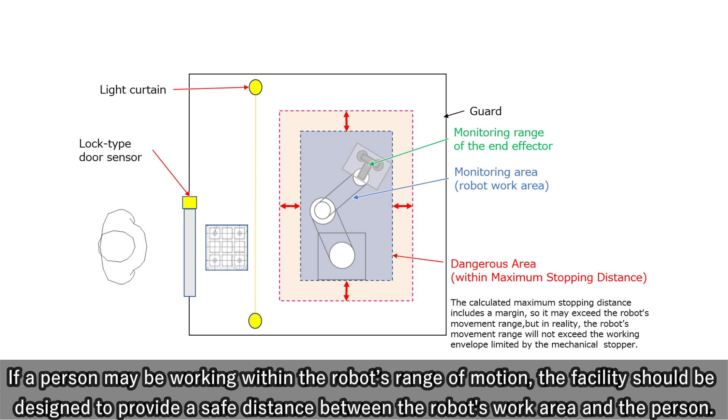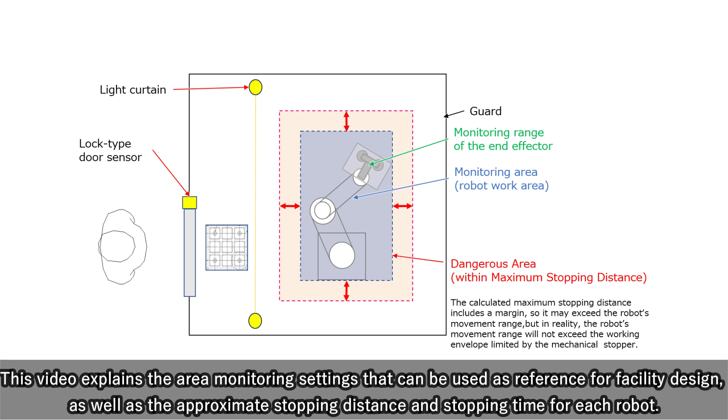If a person may be working within the robot's range of motion, the facility should be designed to provide a safe distance between the robot's work area and the person. This video explains the area monitoring settings that can be used as reference for facility design, as well as the approximate stopping distance and stopping time for each robot.

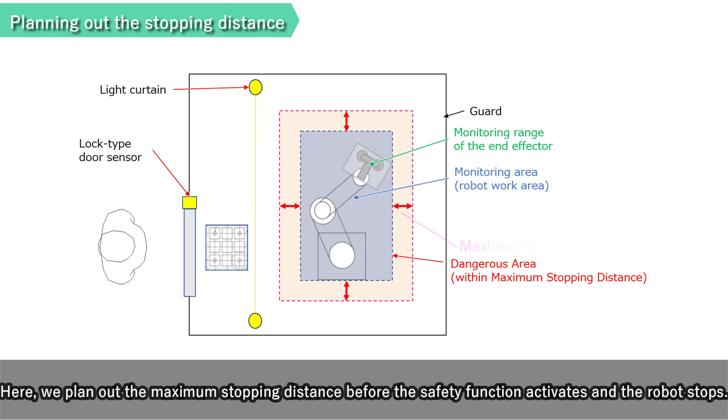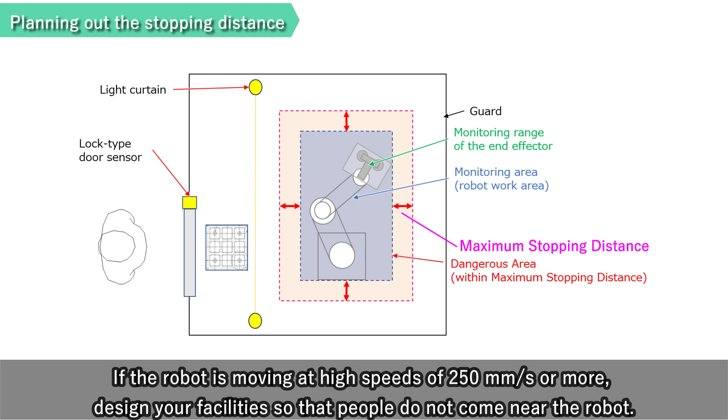Here, we plan out the maximum stopping distance before the safety function activates and the robot stops. If the robot is moving at high speeds of 250 mm per second or more, design your facility so that people do not come near the robot.

Stopping distances may vary depending on the operating conditions, the status of the robot and other factors. Make sure to check the stopping distance in the robot's actual usage environment, as well as whether the safety functions are operating correctly.

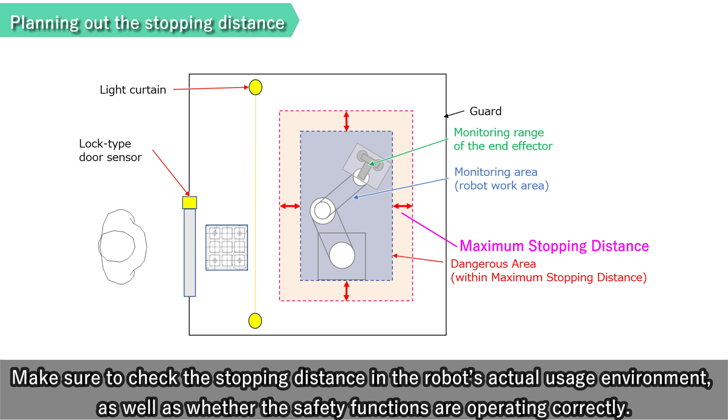For SCARA robots, calculate the stopping distance by referring to the stopping time and stopping distance at emergency stop in the installation manual for the robot in question.

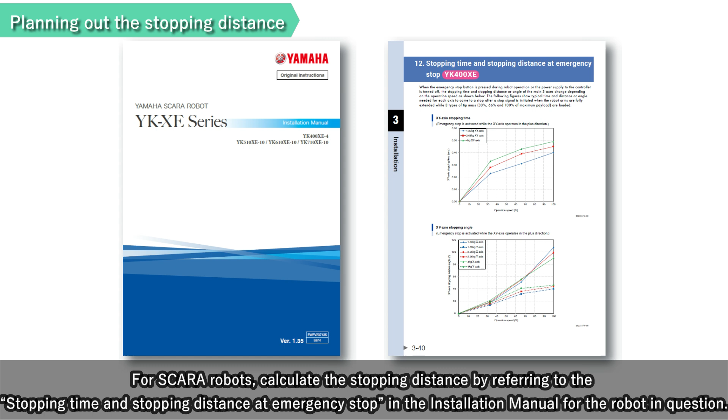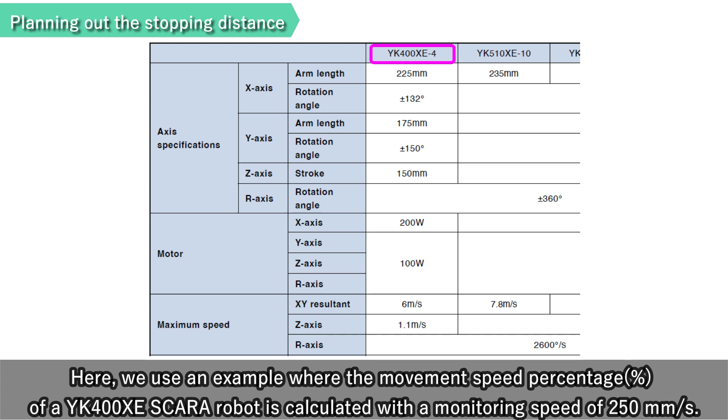First, calculate the movement speed percentage of the monitoring speed, based on the maximum speed of the XY axis listed in the installation manual. Here, we use an example where the movement speed percentage of a YK400XE SCARA robot is calculated with a monitoring speed of 250 mm per second.

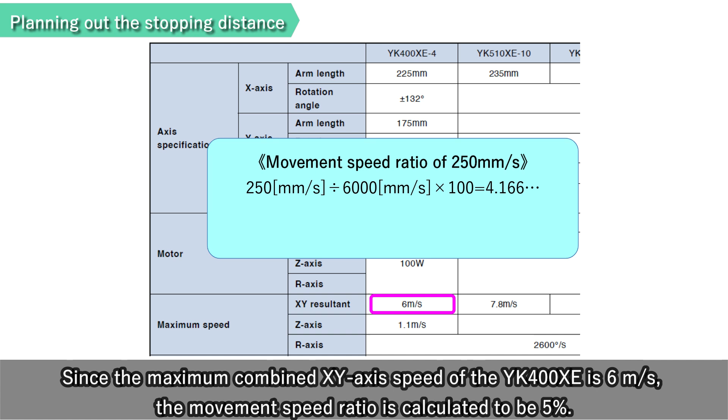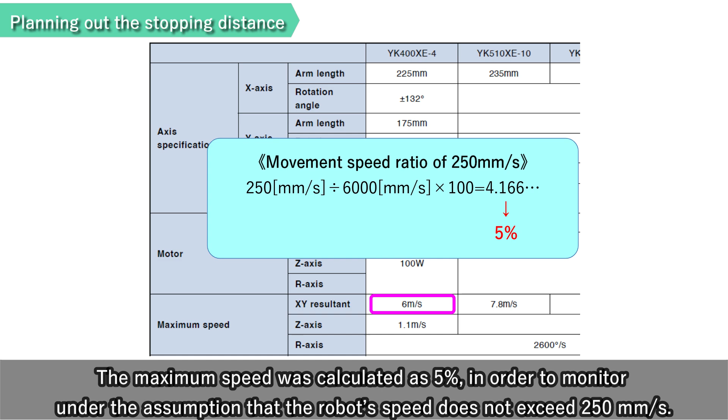Since the maximum combined XY axis speed of the YK400XE is 6 meters per second, the movement speed ratio is calculated to be 5%, rounded up to the first decimal place. The maximum speed was calculated as 5%, in order to monitor under the assumption that the robot's speed does not exceed 250 mm per second.

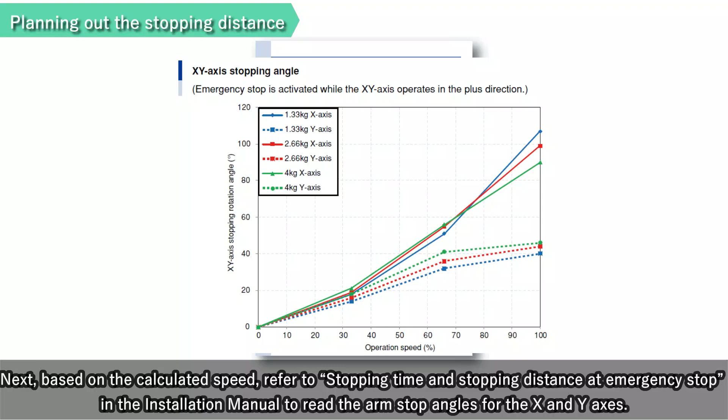Next, based on the calculated speed, refer to stopping time and stopping distance at emergency stop in the installation manual to read the arm stop angles for the X and Y axes.

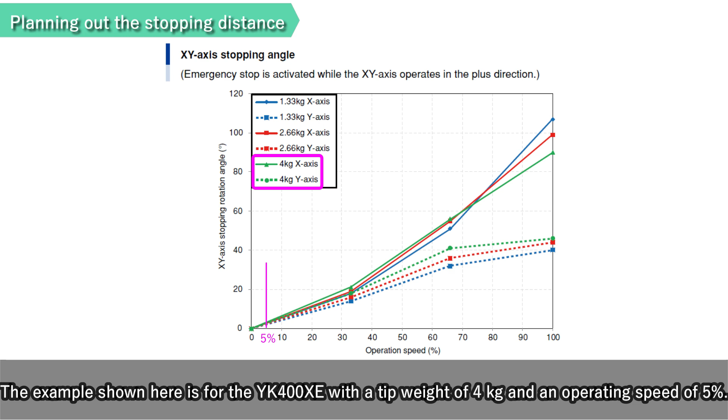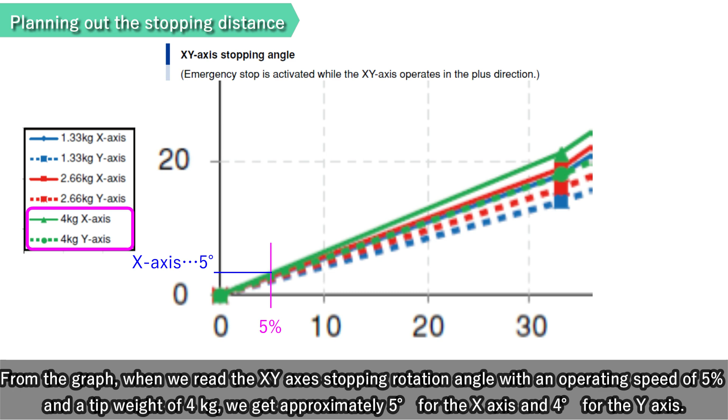The example shown here is for the YK400XE with a tip weight of 4 kilograms and an operating speed of 5%. From the graph, when we read the XY axis stopping rotation angle with an operating speed of 5% and a tip weight of 4 kilograms, we get approximately 5 degrees for the X-axis and 4 degrees for the Y-axis.

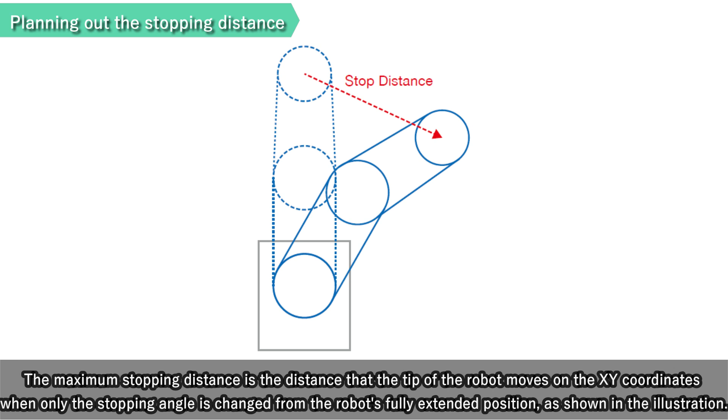Next, we calculate the stopping distance based on the stopping angle that was read. The maximum stopping distance is the distance that the tip of the robot moves on the XY coordinates when only the stopping angle is changed from the robot's fully extended position, as shown in the illustration.

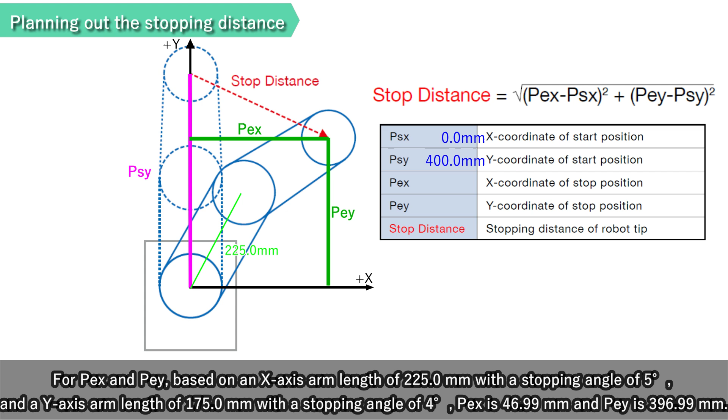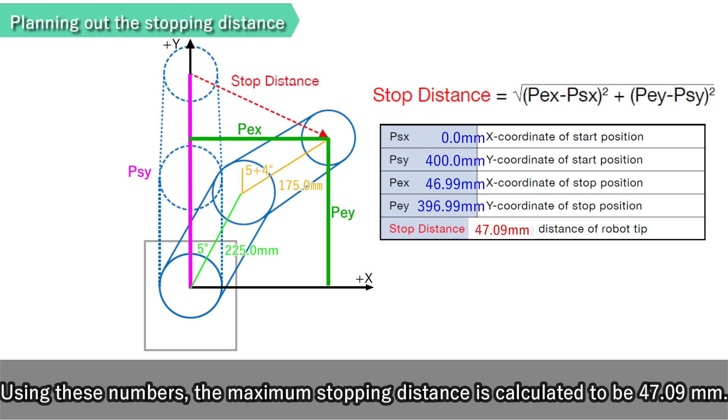For PEX and PEY, based on an X-axis arm length of 225.0 mm with a stopping angle of 5 degrees, and a Y-axis arm length of 175.0 mm with a stopping angle of 4 degrees, PEX is 46.99 mm and PEY is 396.99 mm. Using these numbers, the maximum stopping distance is calculated to be 47.09 mm.

The stopping distance during emergency stop in the installation manual does not account for the length of the end effector. If an end effector is attached to the tip of the robot arm, add the maximum length of the end effector to the stopping distance to ensure a safety perimeter.

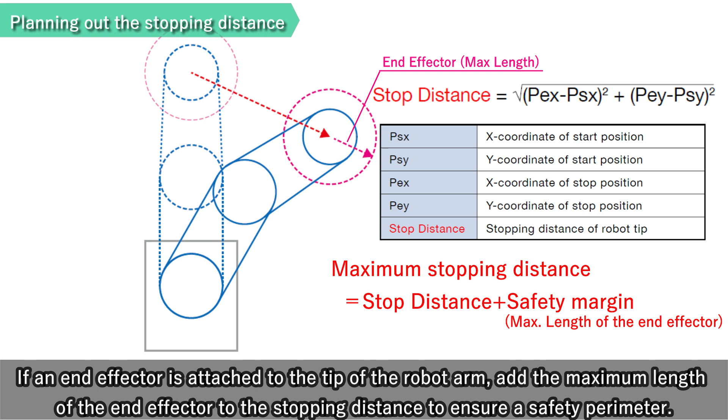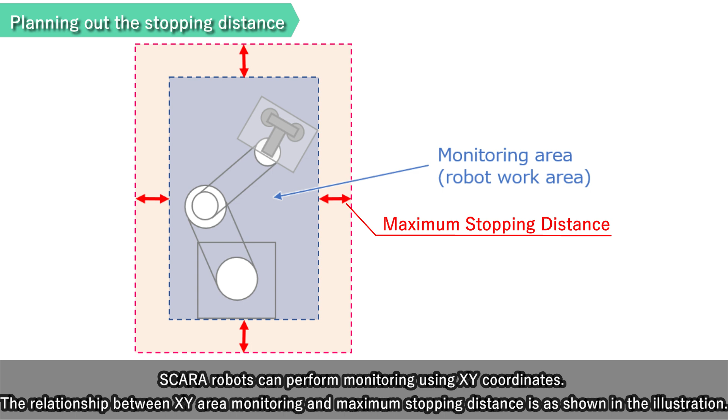SCARA robots can perform monitoring using XY coordinates. The relationship between XY area monitoring and maximum stopping distance is as shown in the illustration. For more information on XY area monitoring, refer to the RCX3-SMU parameters video.

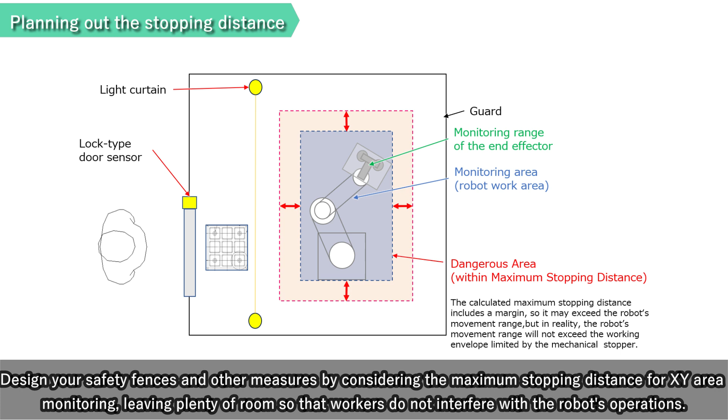Design your safety fences and other measures by considering the maximum stopping distance for XY area monitoring, leaving plenty of room so that workers do not interfere with the robot's operations.

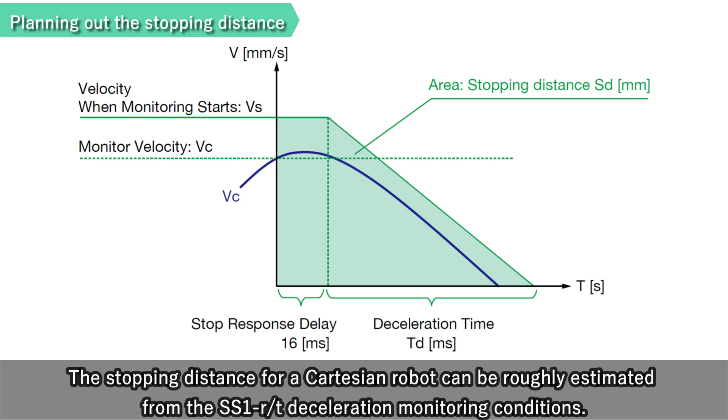The stopping distance for a Cartesian robot can be roughly estimated from the SS1-r/t deceleration monitoring conditions. First, run the deceleration monitor configuration wizard to set the deceleration monitor parameters.

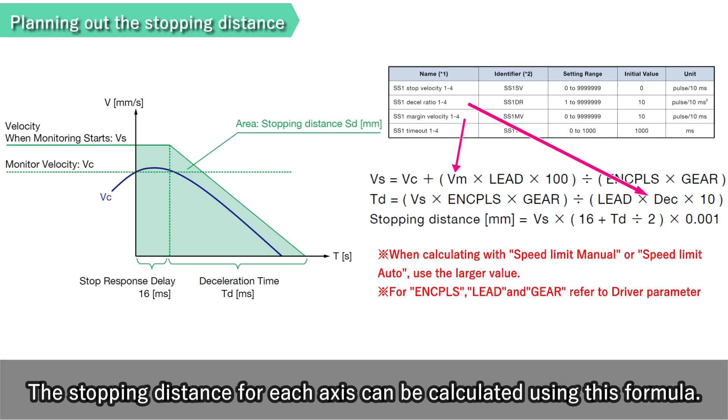The stopping distance for each axis can be calculated using this formula. The monitoring area for Cartesian robots is set using the area soft limit parameter.

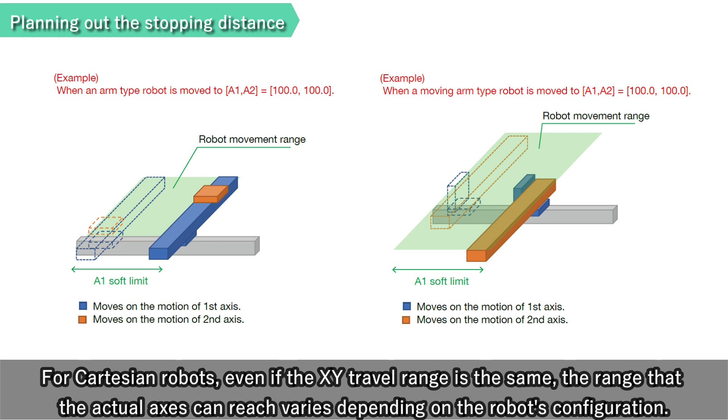For Cartesian robots, even if the XY travel range is the same, the range that the actual axis can reach varies depending on the robot's configuration. Determine the area by limiting the motor's movable range while checking the robot's configuration and actual operations.

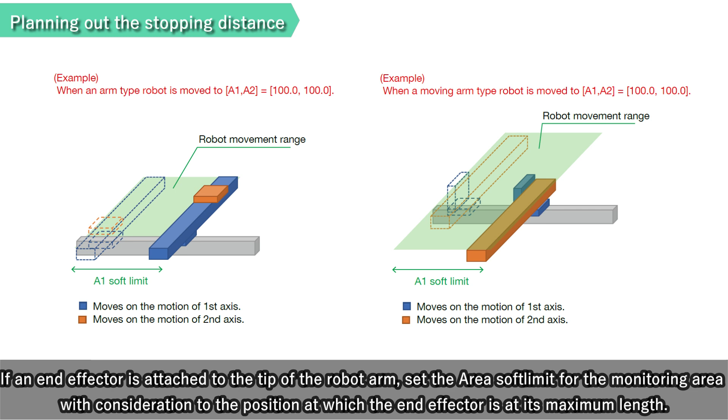If an end effector is attached to the tip of the robot arm, set the area soft limit for the monitoring area with consideration to the position at which the end effector is at its maximum length.

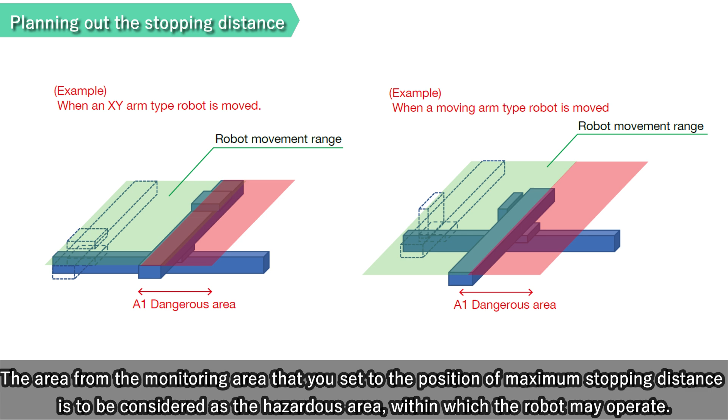The area from the monitoring area that you set to the position of maximum stopping distance is to be considered as the hazardous area, within which the robot may operate. Design your safety fences and other measures by considering this area, leaving a safety perimeter so that workers do not come near this area or interfere with the robot's operations.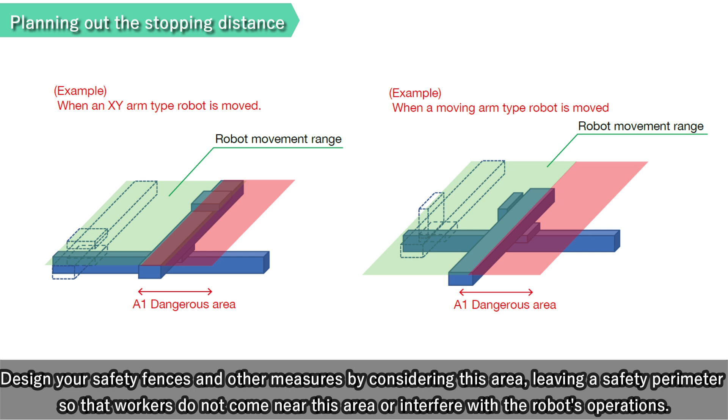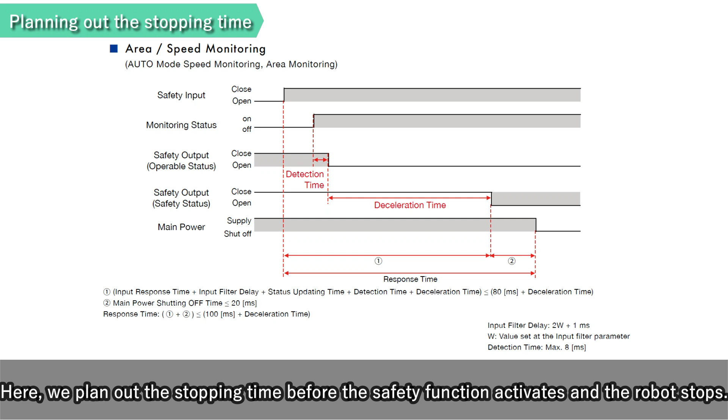Here, we plan out the stopping time before the safety function activates and the robot stops. This gives a reference for the approximate stopping time of the robot when designing your own facilities. Stopping times may vary depending on the operating conditions, the status of the robot and other factors.

Make sure to check the stopping time in the robot's actual usage environment, as well as whether the safety functions are operating correctly. Consider a maximum of 100 ms for the filter delay, detection time and so forth, aside from the time required for the robot to actually stop once the safety function is activated. This does not include the time during which an external safety input device detects a hazard and opens the output signal to the SMU.

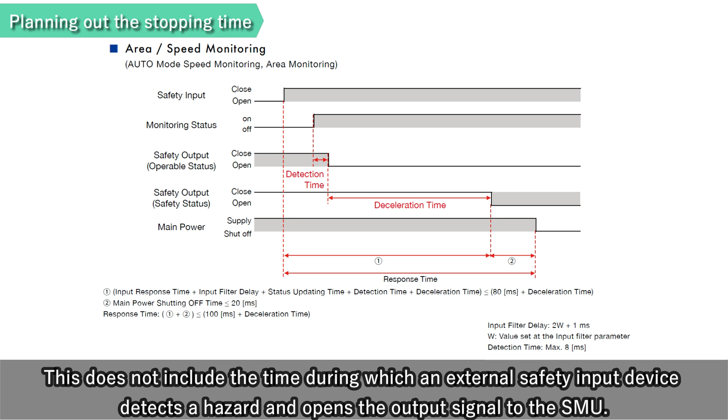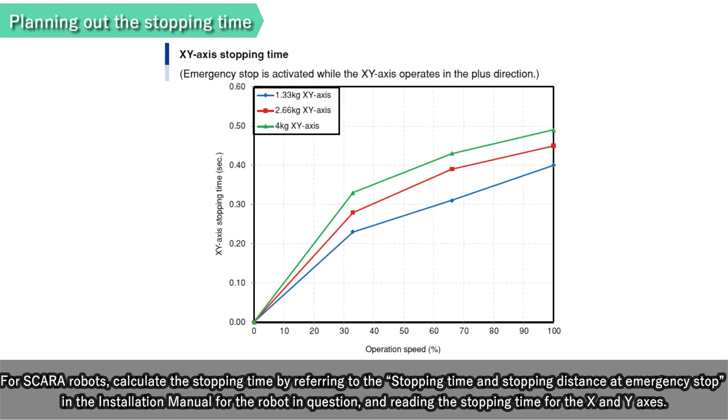For SCARA robots, calculate the stopping time by referring to the stopping time and stopping distance at emergency stop in the installation manual for the robot in question, and reading the stopping time for the X and Y axes.

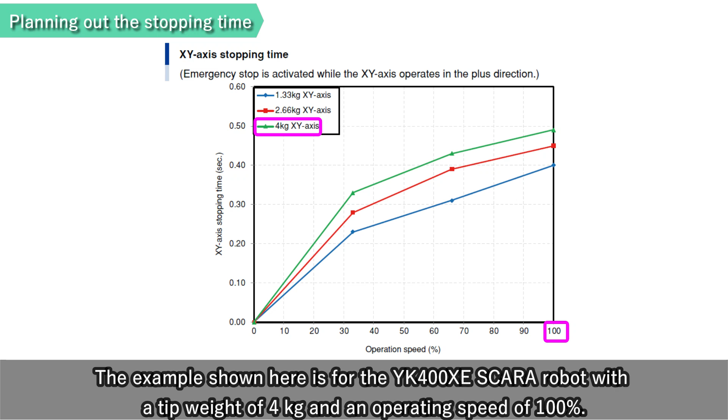The example shown here is for the YK400XE SCARA robot with a tip weight of 4 kg and an operating speed of 100%. From the graph, for an operating speed of 100% and a tip weight of 4 kg, we get approximately half a second for the XY axis stopping time.

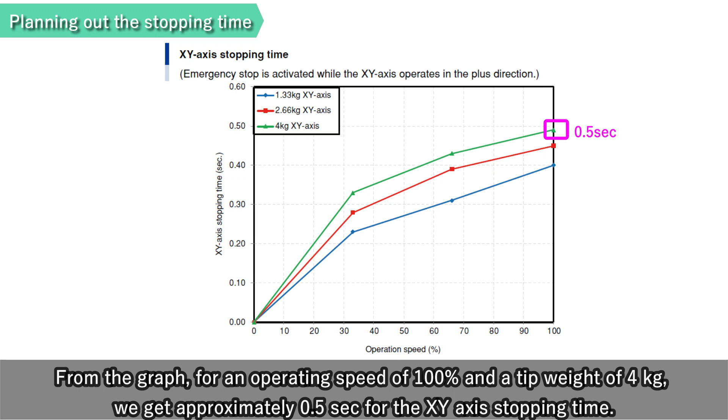We add a maximum response time of 100 milliseconds to this, to get the total stopping time required before the safety function activates and the robot stops.

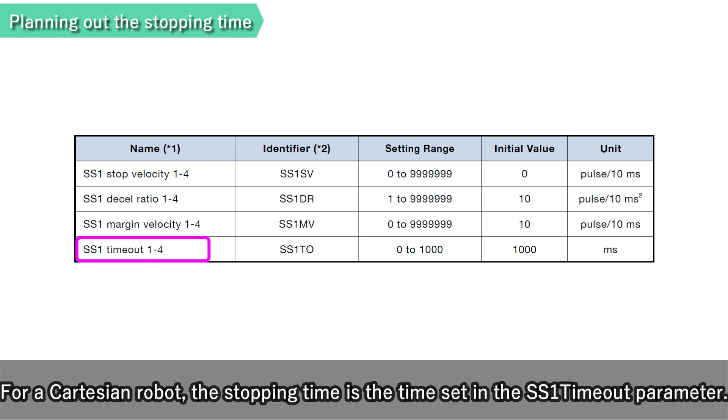For a Cartesian robot, the stopping time is the time set in the SS1 timeout parameter. We add a maximum response time of 100 milliseconds to this, to get the total stopping time required before the safety function activates and the robot stops.

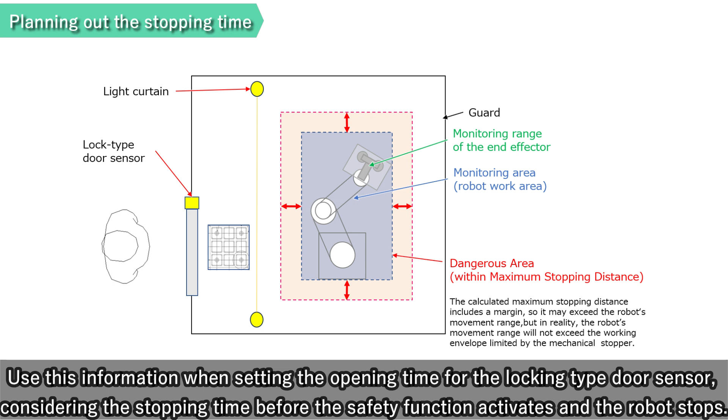Use this information when setting the opening time for the locking type door sensor, considering the stopping time before the safety function activates and the robot stops. That is all for the facility design.